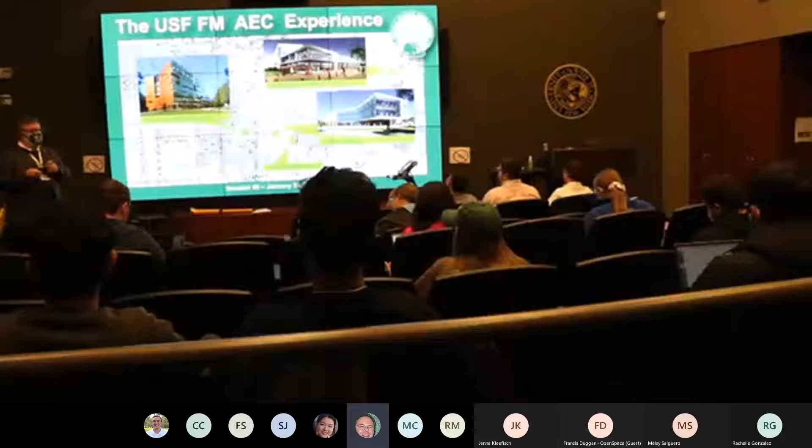So let's see, all right. So we are, as I said, in the second semester. This AEC experience encompasses in-person tours, you'll get to tour the job sites twice a semester. We also have a tool that you can tour virtually, you'll learn about that today, that you can walk around the job sites virtually, which is pretty cool. There's also webcams. So all of that, if you just Google USF AEC experience, you'll be taken to the facilities management webpage that outlines all the opportunities, right there in the bottom right-hand corner. Also, if you want to, you can join us on the Bulls Connect and connect with us.

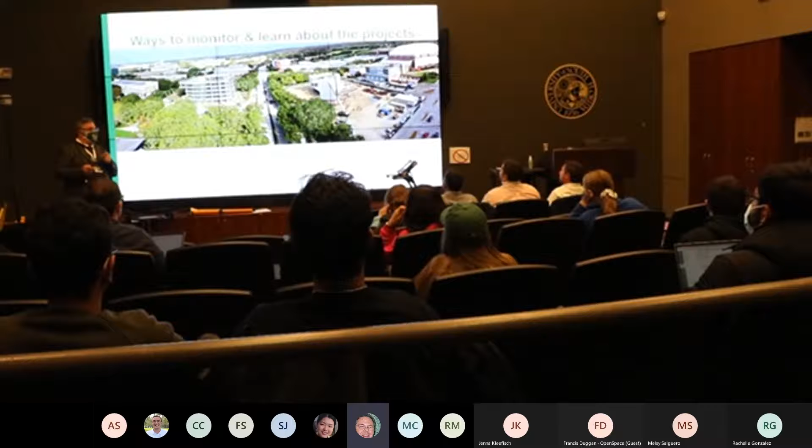So this is a fairly recent photo taken. You can see the Honors College on the left of the screen, the Wellness Center on the right-hand side of the screen, and all the way at the top right, you'll see an area of sand. That's our sandbox that is now the indoor practice facility. They're building the foundations for that, and probably in about 2 weeks you'll start to see some big steel going up over there.

Today, what we're going to be talking about is how other technologies are used to support the design and construction process. You may think, well, I'm in computer science, information technology, this really doesn't apply to me. Well, you'll see how a bunch of, and I use this term affectionately, a bunch of geeks from, I think it was MIT, got together and started a company called OpenSpace that is transforming the way we document construction projects these days, incorporating artificial intelligence. Francis will talk about that, talk about how we do research about the existing sites that we weren't able to do a few years ago.

So today we have Daniel Gessman, and I'm just going to refer to these guys. So if I rode over in an SUV from our office today, it's like driving with the Three Stooges. So Daniel Gessman is our GIS analyst, he'll tell you about what GIS is.

Richard Piccinini is our university civil engineer. And Francis Duggan, who is going to join us online, and we'll figure out how to pipe him into the speakers, he's going to give us a demonstration of OpenSpace and what that is and what that software tool does. And then Rob Baynard is our quality management coordinator, he's going to talk about some of the technologies we use to actually figure out where our buildings are leaking, how we maintain our roofs, how we look for that kind of stuff. You may think from a science standpoint, this is really cool to actually use some of this technology in actual application, how it's actually employed.

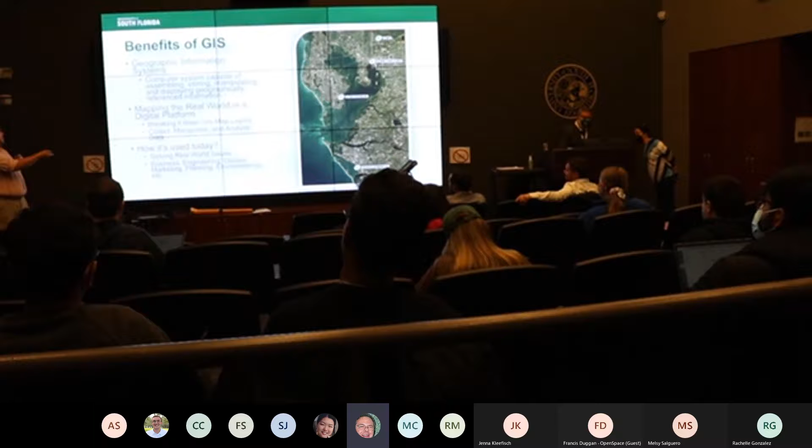Maybe. But we need to know not only what's under the ground, but then what is the impact of putting that structure on the ground as well. Maybe. Oh. No? Okay.

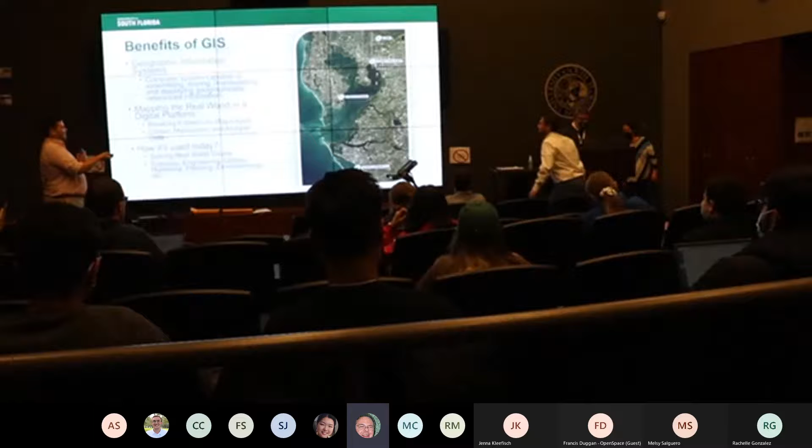One more, okay perfect. So again, some of the ways that GIS is used, a big one is in decision making. It's obviously influencing policies, determining what is the scale of said issues that are on the ground.

Asset management: what do you have? Where is it? What's the information that you need behind it? And then taking that information and also modeling it.

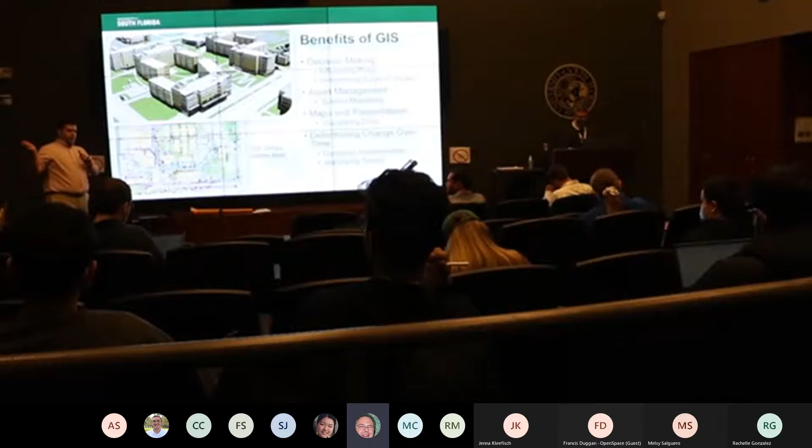Being able to create a system where you have points representing valves for a water line, and you have a water line connecting all the way further down the street. If I turn this valve off, what's the impact down the line?

So we can actually model systems like that, especially in Rich's presentation. He's going to talk a bit about stormwater and how, when it rains, what is the impact? Will our system be able to handle that 100-year flood?

Maps and presentations, so visualizing data. It's really a much better way to view things. I mean, I can imagine you guys looking at an Excel spreadsheet every day would get really boring. So in this sense, it's taking that information and putting it into a geographic reference and being able to see it.

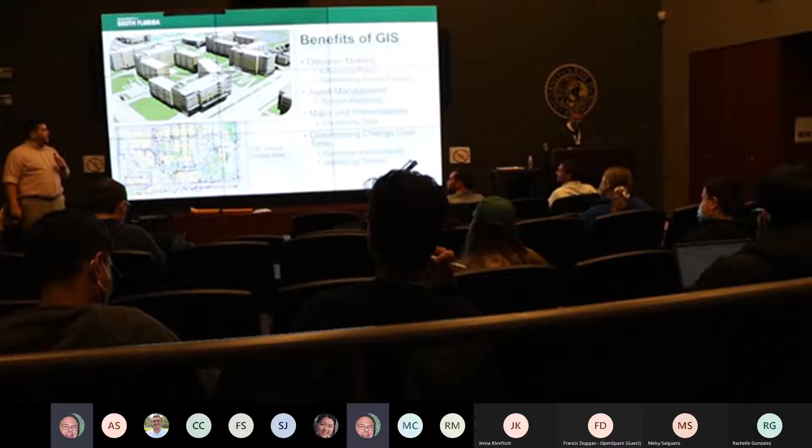And then determining change over time, like looking at condition assessments, looking at the conditions of our utilities in the ground. Over time, do we need to replace those? And again, rounding it all the way back to decision making.

As you can see, some of the images we have is one of the 3D models that we've built using BIM. This was actually taken with imagery. And then some of our utility networks throughout—it looks like a mess, but we somehow know what we're talking about.

Next slide, please. For some reason, the clicker doesn't want to work today.

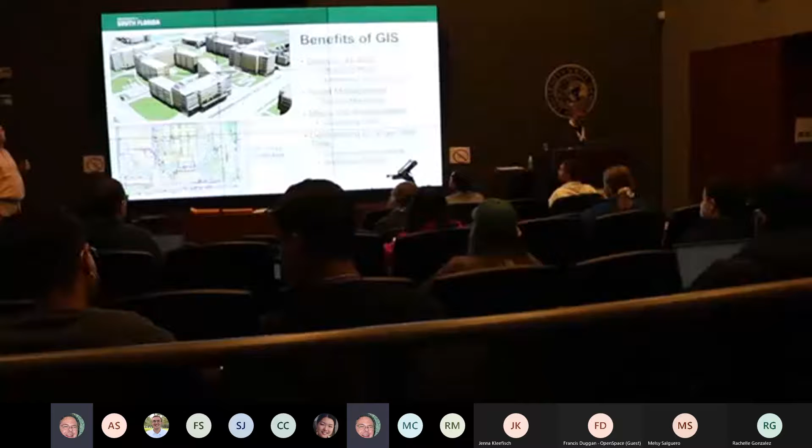So here we are. Relating to what you guys have been listening to lately, we've built a GIS system here at USF. And where we really started was with AutoCAD drawings, that was all we had. So all we had was points, lines, polygons in a CAD drawing or in a PDF, and you really didn't know what you were looking at.

You couldn't click on a manhole and have it tell you all the elevations associated with it. You couldn't click on a building and have all the building information associated with it. When was that building constructed? Who owns that building? Is it leased? Is it owned by the state?

So really, we didn't have any of that. We converted all of our CAD drawings into our base maps into GIS. And where we are today, we've worked with the library to build a facilities enterprise GIS, which I'll talk more on the next slide. We also have BIM, CAD, and FAMIS, our asset management system. That's how the drawings come in after a building is complete. We receive those drawings, or a list of assets associated, and we tie those into either our asset management system, or we relate all those utility drawings and civil drawings into our GIS system.

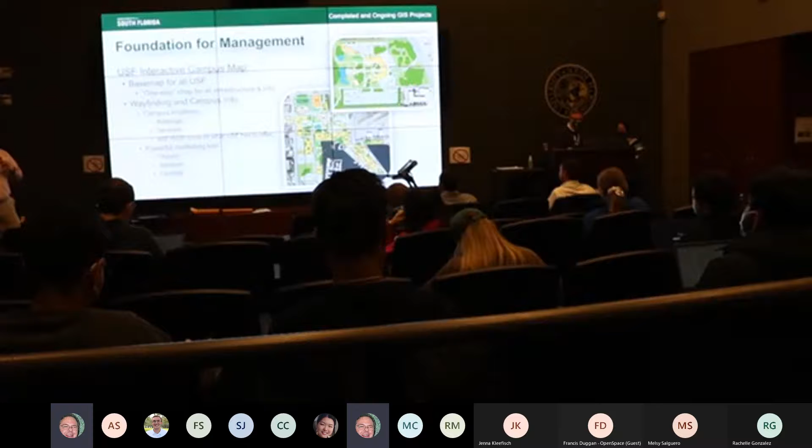So a little bit more about our interactive map that we're developing. Like I said, it's a one-stop shop for USF information, for public information. Everything from buildings, services such as where is your dining, where are the Federal Credit Union spots, where are all the departments within those buildings, where are your gender-neutral restrooms, where are your blue light phones, etc. The list goes on and on. It just allows students to show what USF has to offer. Also, we're looking at it as a major marketing tool to potentially bring in prospective students, any visitors coming to campus, knowing where to park.

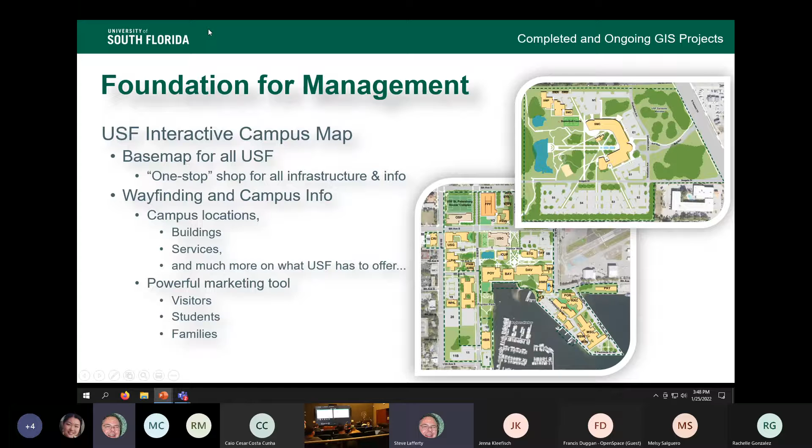And of course... yeah, I know, he's cutting me short apparently. Who would have thought two years in we would have figured it out by now.

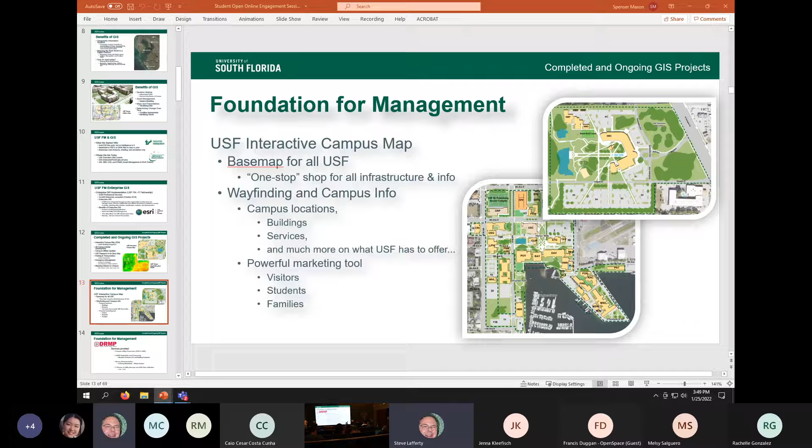So some of the projects we look at, we treat GIS kind of like a foundation for management. It really is a one-stop shop for campus information. We worked with a company called DRMP. They did all of our conversion from CAD to GIS. We flew LiDAR for the campus. We put in some survey monuments, and we did three utility phases where we did surveys and GPS data collections.

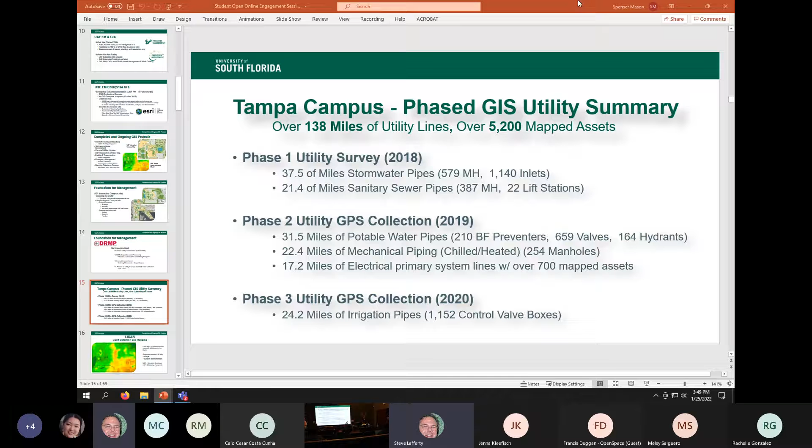I will avoid the long list of things that we've collected, but in short, we're still doing even further collection. We're probably looking at anywhere between 150 to 200 miles of utility lines. And at the moment, we're over 5,200 mapped assets just for the Tampa campus alone, and we're only a 1.5 square mile rectangle.

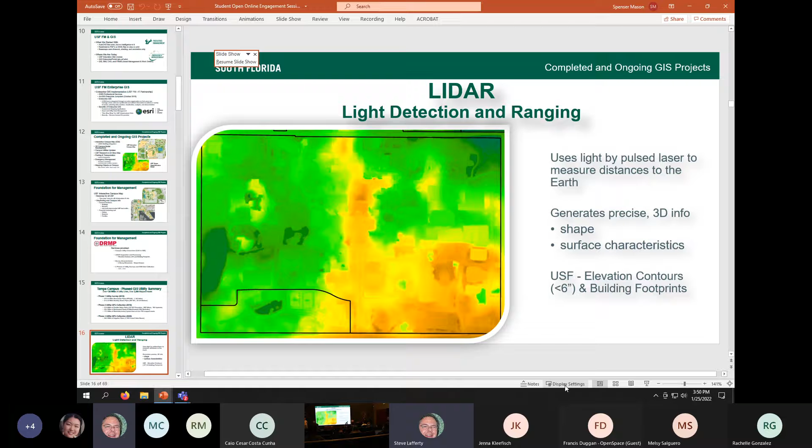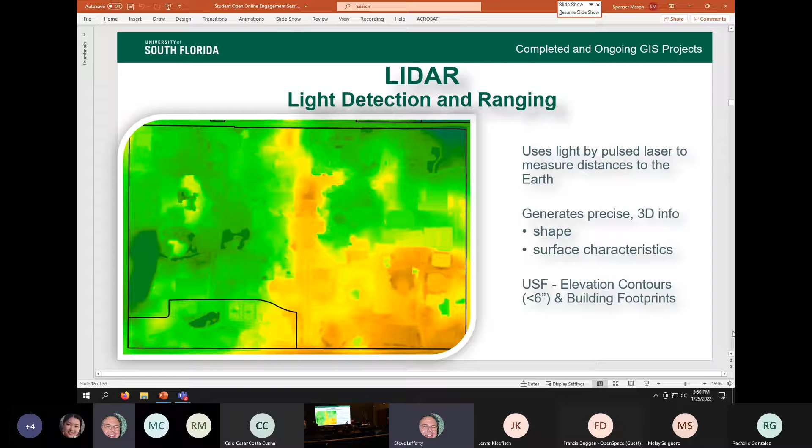One of the big things we had done was LiDAR, or light detection and ranging. We had a company do a flyover of campus, and it uses light penetration where it pulses down and we receive the signals back from the plane, giving us a precise 3D image or map of the surface characteristics of our campus. You can really get an image of the elevations of our campus. We can pull out elevations, building footprints, hardscape — we got pretty accurate results, within 6 inches of accuracy for most of our stuff.

Steve, can I steal you for the next slide, sir? I'm almost done, we got a lot here.

Oh, can we go back probably 3 slides? One more? Yeah, there we are.

With this project, we also bought a brand new GPS unit that gives us centimeter accuracy. On most stuff on a clear day, we're within probably 0.1 to 0.2 feet on all the structures that we're mapping.

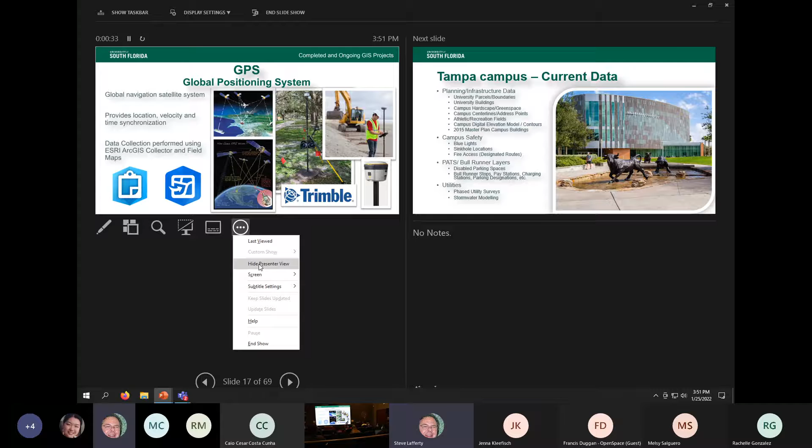We're using some data collection tools through Esri that allow us to map everything from valves, as we were doing before, to mapping sinkholes, to mapping anything we want. I think Grounds was out there doing benches and trash cans a few months ago.

So a long list of data that we've brought in over the past 4 years, covering planning and infrastructure, campus safety, all the parking and transportation layers, and utilities.

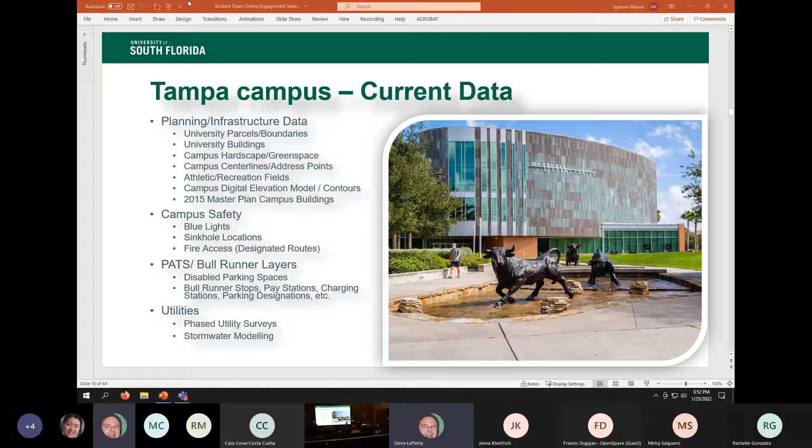And then what do we do with all this information? Now that we've gone through how we've collected it, we take this and use it for different planning efforts. As you see up on the top right, that's the 2015 campus master plan.

We now can look at the utilities digitally, zoom in and out, view it all in the palm of your hand or just on your screen. We look at campus safety, so campus awareness before, during, and after an event that potentially happened.

So it allows us to plan better for hurricanes. It also gives trainings for any potential active threats or other incidents that may occur.

Utilities infrastructure management gives us the better ability to map with 811 locates. So our utilities guys have those maps in the palm of their hand just by zooming around, and it actually follows their location based on their phone or tablet, leading them up to the manhole, the valve, the transformer they're looking for.

I mean, they can't really miss the transformer, but it also allows us to share information out to other agencies. We share information to Hillsborough County 911, Pinellas, and Sarasota Manatee. We also share information with Esri's Community Maps to update the base maps that sit behind all of our applications.

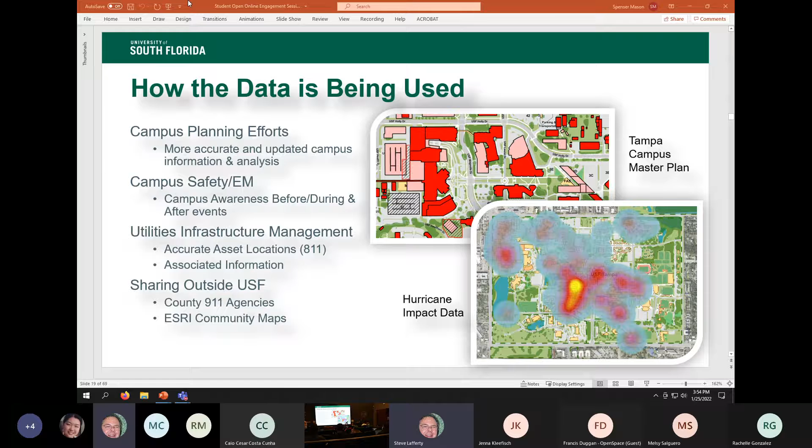So I'll leave this open for question and answer before I bring Rich into this. Do we have any questions? Oh, it's quiet. Raise your hand, or just scratching?

I could refer to Rich on some of these too. Not that I can think of off the top of our heads.

It's just been, we found a lot of utilities that we never thought were there, or things that were abandoned in place from a university that's 60 years old, that a lot of times we've hit with a shovel or someone else has hit with a tractor.

Okay, let me know if anyone has any good jokes while we wait. Mine are all dad jokes, they're not very good, it's all about lift stations. No, that's a different presentation. It's a dirty joke. That's true.

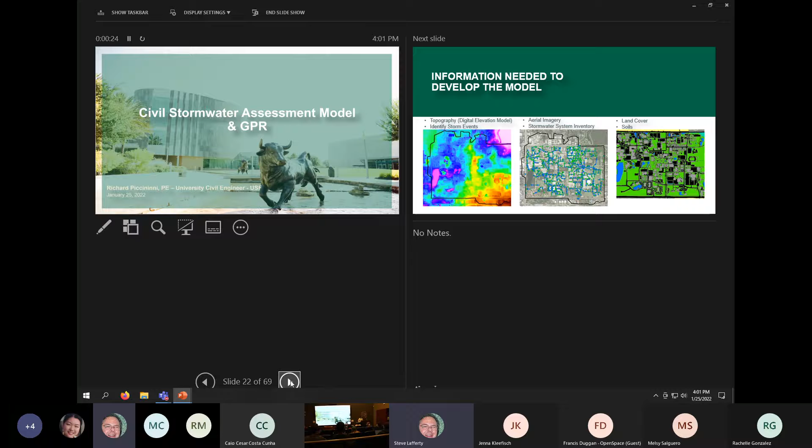There we go, there we are. Okay, that's one. All right, is that me? That's you, all right, that's you. All right, here we go. Now we just have to present it to the people on Teams. Oh, man. There you go, try that. No, that's a different screen up there. You may have to click both. Let's go to this one. Hold on. I don't know how to tell if the people on Teams can see, they're the...

Seeing what's on this screen. All right, okay, so can everyone see this, the slide with the bull and my name on the bottom? No, negative. All right, so, that one? All right, well, you go talk and I'll play with this. Well, that's where I'm talking from. I can't talk if... all right.

Oh, there we go. All right, so I used a lot of Dan's material that he collected, and I created a stormwater model. There are several things you need in order to create the stormwater model. If you look on the picture on the left, that's the LiDAR information that we got.

You can see the red areas are the higher portions of campus, and it goes down to the pink areas, which are where our retention ponds are, in essence the lower elevations on campus. Then the middle one shows all the pipes and inlets that we located, put on an aerial just for convenience sake. One of the last things you need is the ground cover, what it is, for instance the difference showing where a building is and grass and/or roads. That'll help you model better where the stormwater actually goes.

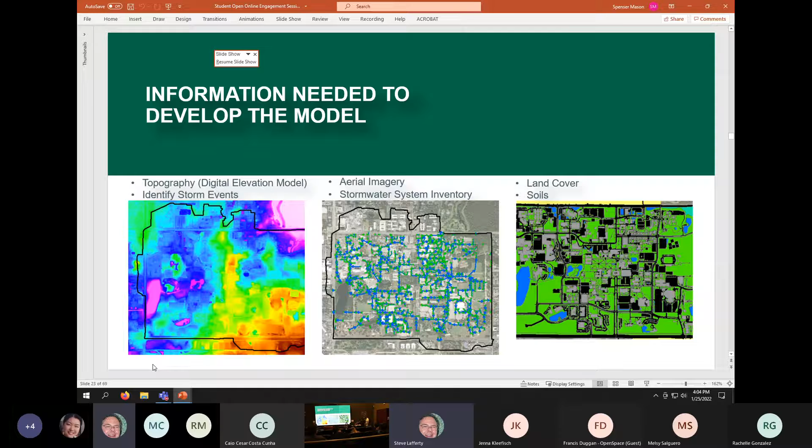So when we imported the LiDAR into the model, this is what comes in. It's a 2D mesh, and you can see there's a whole bunch of triangles, and each of the connection points, the center points, has an actual elevation associated with it. When you stick it on the model, a drop of rain would go depending on how the elevations between those points are set up.

The LiDAR data gets a little squirrely because if you bring it in over here, you're going to have a building, and the building would tend to go vertical, which would make your lines incorrect. So we have to go in and create break lines for that so we can identify where the building points are.

Similarly with the roadways, when there's a curb and gutter, you can see this is crown, and that helps you direct the water into the inlets, curbs and gutters. Now, if you look on the page, the X's and circles are where the inlets and pipes are located.

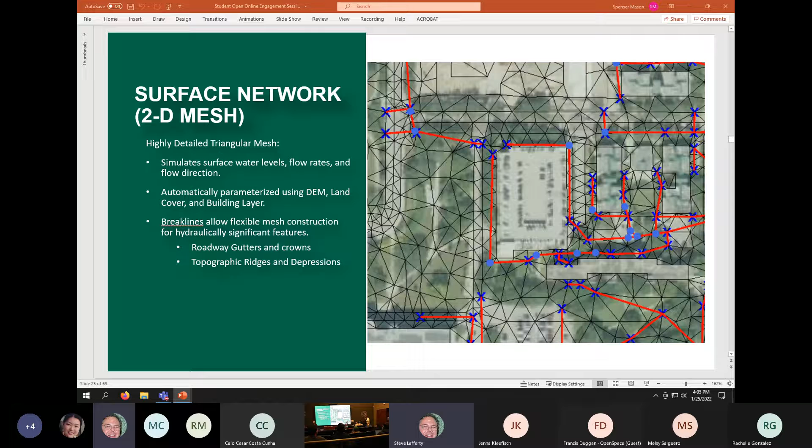Once we ran the model using the information shown, we were able to get some good information out of it. For this example, I created a path of a stormwater pipe. That's what comes out of the model. The stormwater pipe on the bottom, the south end, you can see is full or over capacity, and as it gets down to the part that goes to the northeast, you can see the pipe is much larger and has capacity for expansion.

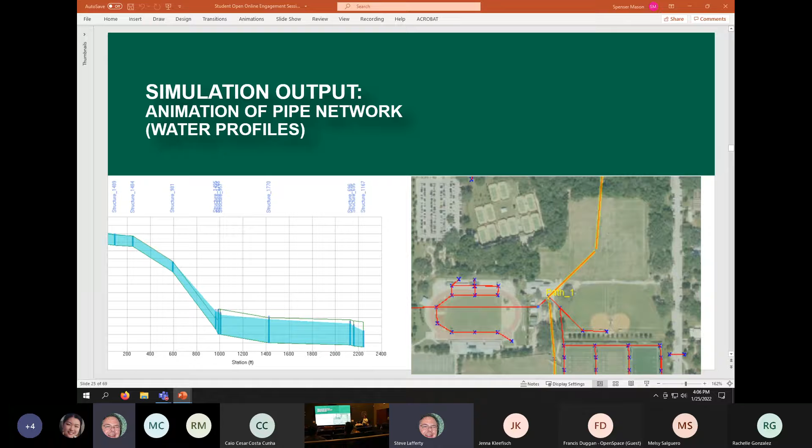Also on this model, let me back up a second. Each different agency requires you to model a different type of storm. For example, the Department of Transportation requires you to model a storm that allows the roadways not to flood. Similarly, the Water Management District wants to make sure the rivers, streams, and people's homes do not flood. So when you create a model...

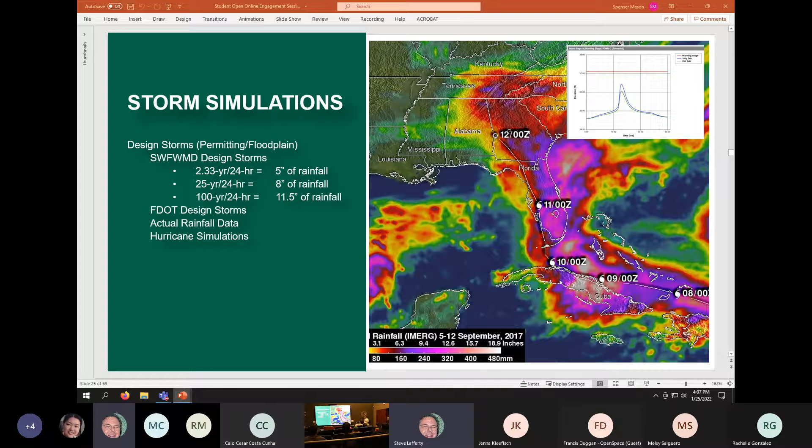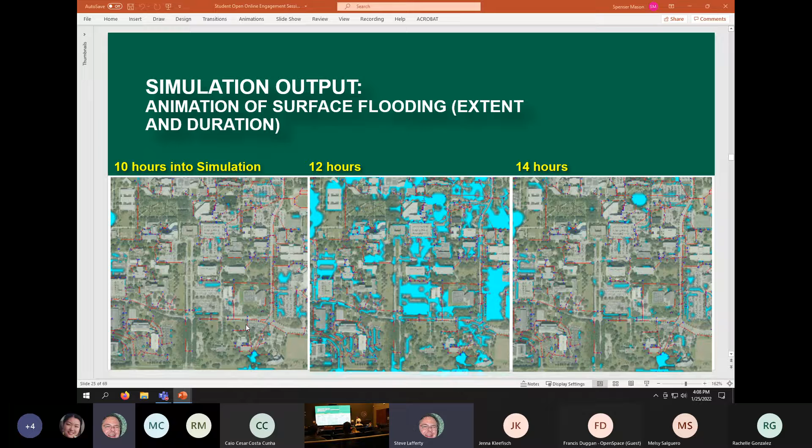Okay, so now we'll get into the way that me and Dan work together to get the data acquisition for all the maps and the stormwater modeling. So we use the GPR, which is over here, our lawnmower.

Then we use... you're going to model this for me? I'm going to model it? Yeah, go ahead and get the Schonstedt for me.

We're going to move to the Schonstedt. They can see this one. So this is essentially a high-powered metal detector, and we use that to find electrical and ductile iron pipes that are under the ground. So we can get an idea where they are with that piece of equipment, and then we can verify with the GPR exactly where they are.

Once we get an idea of where the pipes are, we use the probe rod to poke the ground and physically determine that, yep, the pipe is actually there, and get a depth on it.

And when all else fails, the mighty shovel. We use the trusty shovel to dig it up. Be careful when you use the shovel, some people have fallen using the shovel. Dan, it was quite an event.

We can click one more.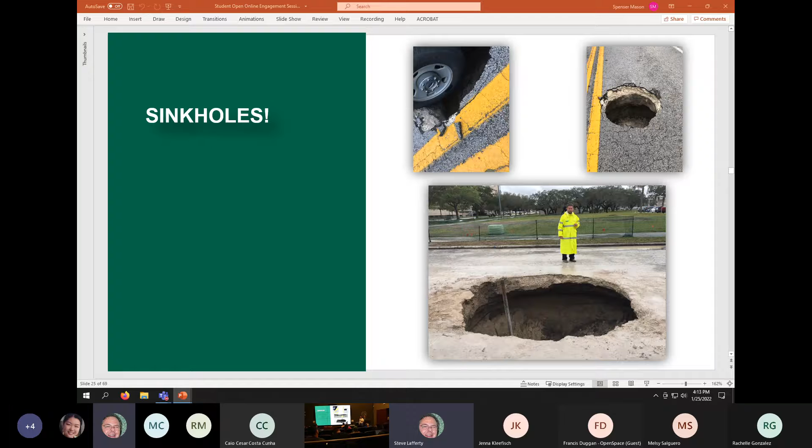And then, you want to talk about the civil? So this is basically between the GIS and all of the civil information that we've got, we can basically build a virtual model of whatever building we're building, whatever campus we're doing, and be able to simulate how they're going to react in certain conditions.

We can do that with traffic. Our mechanical engineer does it with our chilled water and hot water systems. Rich does it with our sewer systems and our stormwater systems. We can now model how all of our different systems are going to operate under light loads, heavy loads, emergency situations, and figure out where we need to invest money in the future so that we can increase the capability of our campus.

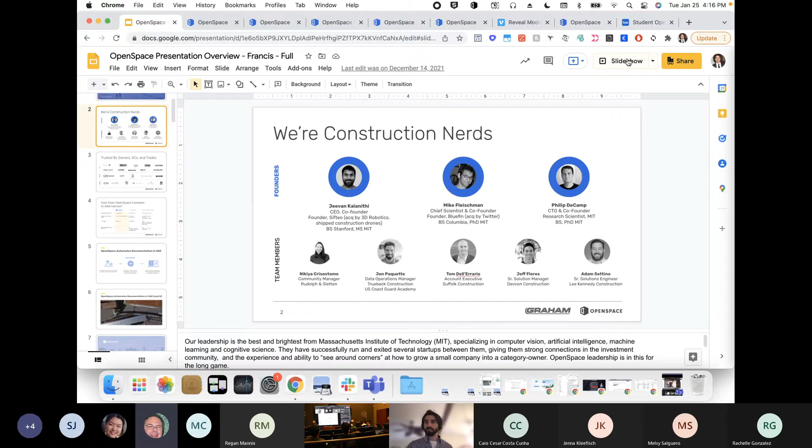For today's presentation, I'll expand on this in a second. Ideally, we're going to talk a little bit about our software and things like that, but also about the direction that these engineers took, as well as myself, in our careers and choices we made, to maybe help encourage some folks in terms of what to get involved in and where things are going, depending on your interests.

So I went to school originally for communications. That was kind of an easy major - basically you could just not have to show up to class. I liked that for the first year or two, and then eventually I switched to accounting and finance, which I thought was a good idea.

And I graduated right into the 2008-2009 recession. So I was at Merrill Lynch, they ended up getting absorbed by Bank of America, and I was back on the picket line, going door to door, selling life insurance policies as well as financial advice, at 22.

So needless to say, eventually I got to this side of the game. I worked for Apple for a little while, then started my own company out in San Francisco. We kept that running, and then eventually I continued - they were like a Zillow competitor. They're still in business today, which is great, but eventually I got over here to the construction side.

So one of the things I would say is, when looking at career paths, think about what you want to have influence on. For better or for worse, there'll always be construction. As you know, with COVID-19 and everything kicking off, I was in New York City, and construction was one of the necessary businesses that started back up right away.

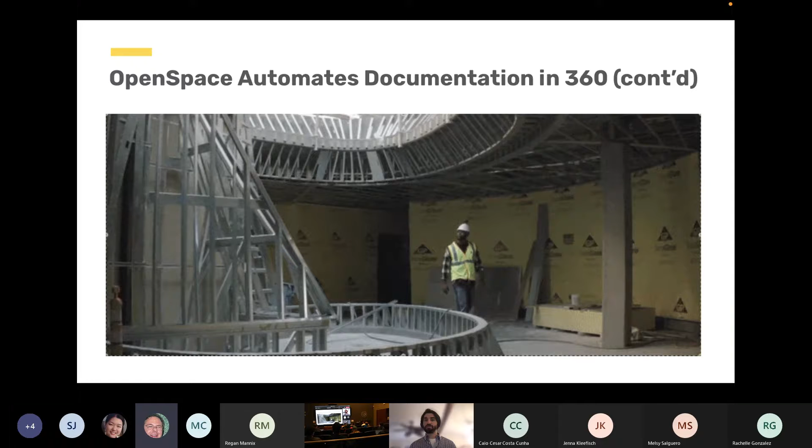Other companies in the space decided to outsource a lot of that stuff, and basically you'd have people overseas manually going through every individual photo, mapping it up. You'll run into a bottleneck pretty quickly, as one of our competitors did.

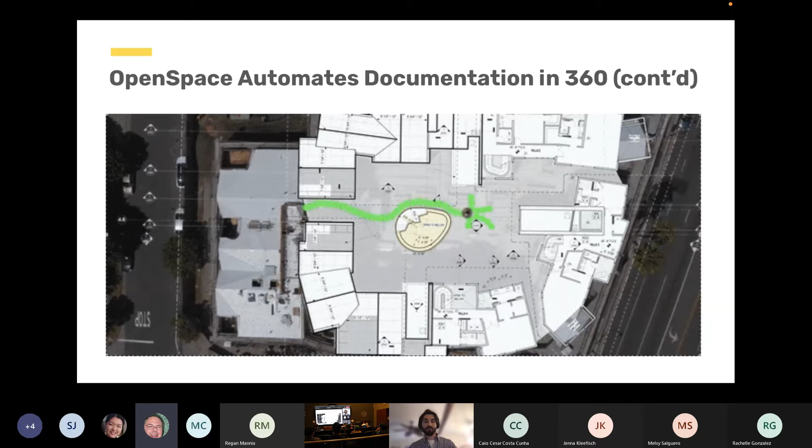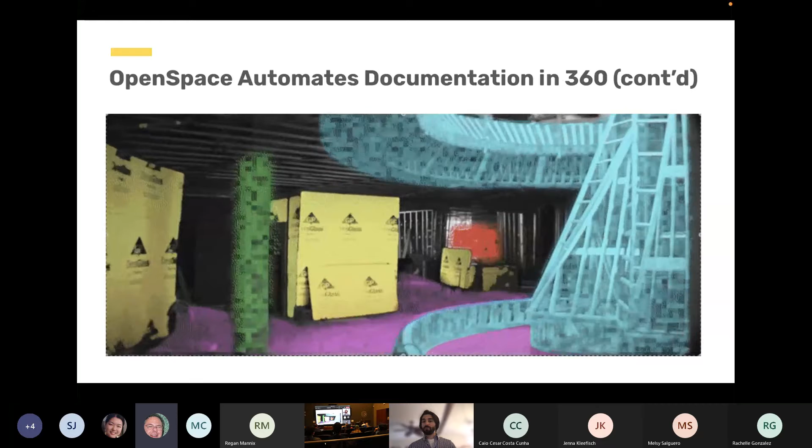And then, of course, our CEO, who's a baller for lack of a better word, he's done pretty well for himself, and he's kind but cutthroat, and he wants the engineers to be the winners in all of this. He decided to just give away a product that was a direct correlation of one of our competitors' products, and put them out of business as well.

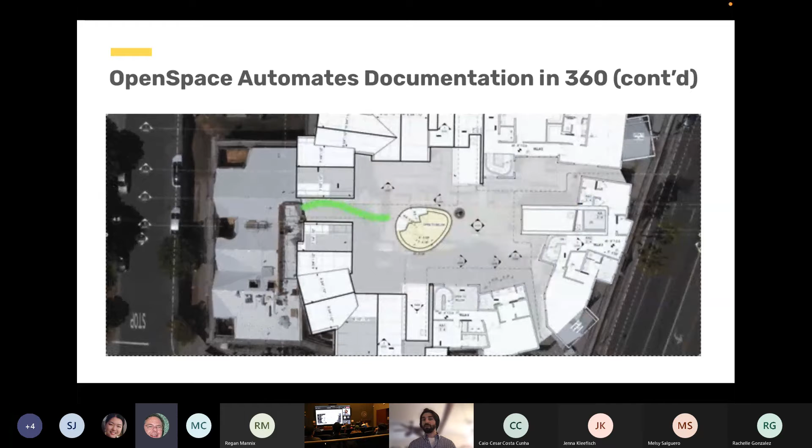So you want to be kind, but at the same time, this is a business, and we're developing automated 360 documentation. When your algorithm and software happen to be light years ahead because you took the time to create it right, you should try to win at that. And that's essentially how it works.

So you push a button, you go for a walk, and in 1 to 6 minutes, because the machine's gotten smart enough, it will automatically create a 360 street view to drive around. Versus manually doing this, which takes people 13 minutes per 10,000 square feet - you have to take all the photos, categorize them, put them in Dropbox or whatever it may be, and send it out. But with this, it's all automated. That was kind of our first thing we wanted to get right.

We want to focus on that. Now the machine reads what it's seeing, similar to Tesla's driverless car, it can tell what a stop sign is, things like that. With this, it can tell how much drywall has been put up, how much framing, how much electrical, how much mechanical, concrete, and we're going to start getting into safety and things like that as we progress.

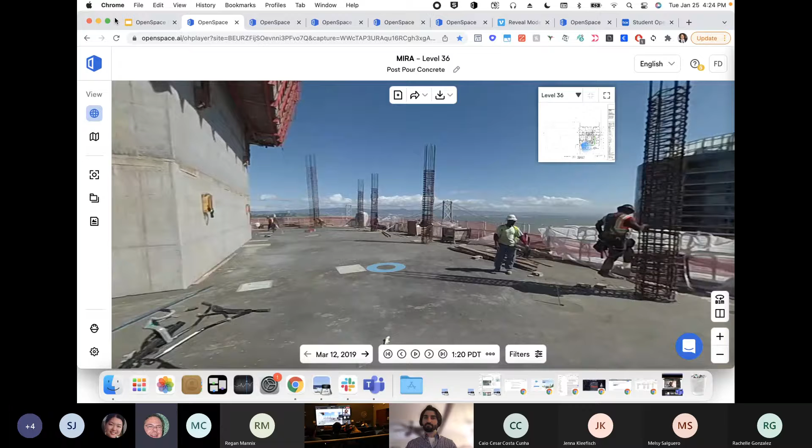So let me jump into the overall product here. I'll get to your campus in just a minute, but just to give you a quick idea, this is the MIRA Tower, a pretty big project out in San Francisco. Somebody goes for a walk, it automatically maps to your set of plans there. And it's like a Google Street View type of environment - you can zip around, apologies for the latency, and take a look at everything that's going on.

This is big for a lot of different folks involved. I can split the view and look at yesterday's before the concrete pour, so it's good for all sorts of engineers and project managers to know, okay, this is what it looks like post-pour, there's certain things below the ground we need to be aware of. It's creating essentially a catalog, a database to live with the assets forever. If you think about USF owning these properties, they're going to want this type of live, historical, visual data on all these different assets they're developing or renovating, to live with the campus forever.

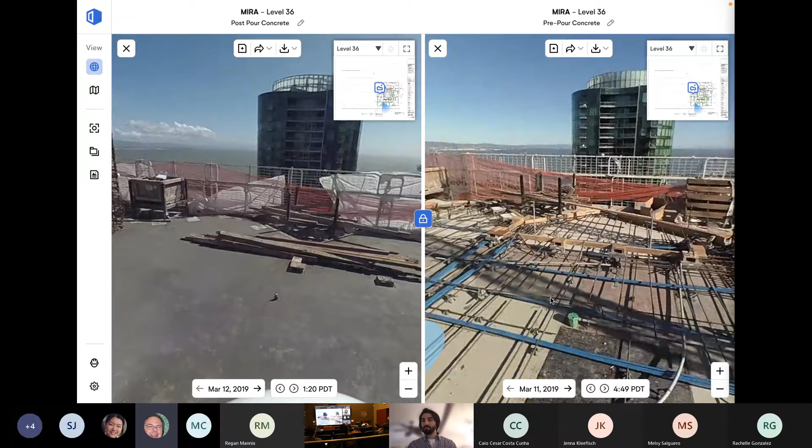Once you get into higher ups, major investment firms like the Blackstones of the world who own a boatload of real estate, from an asset management level this is pretty important, especially looking into acquisitions or heavy renovations on existing portfolio. For people on site - the GCs, the subs - having this data, being able to see through walls, floors, ceilings, makes their job a heck of a lot easier. And when it funnels up to the money and the people getting paid, or the investors, it makes the asset a lot more valuable to have a historical database of everything that's happened.

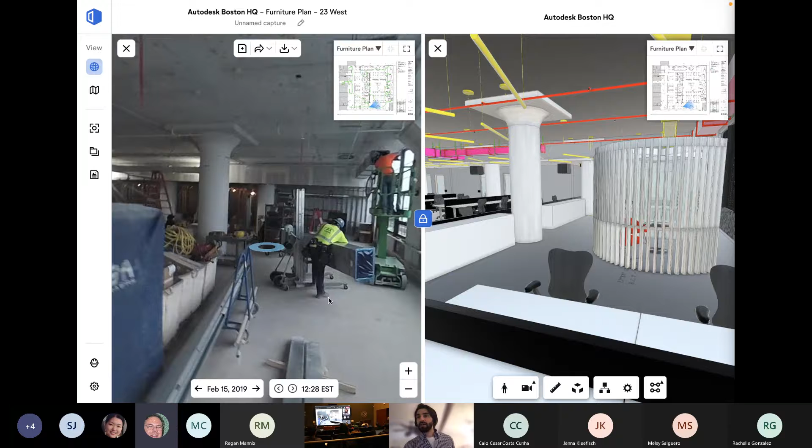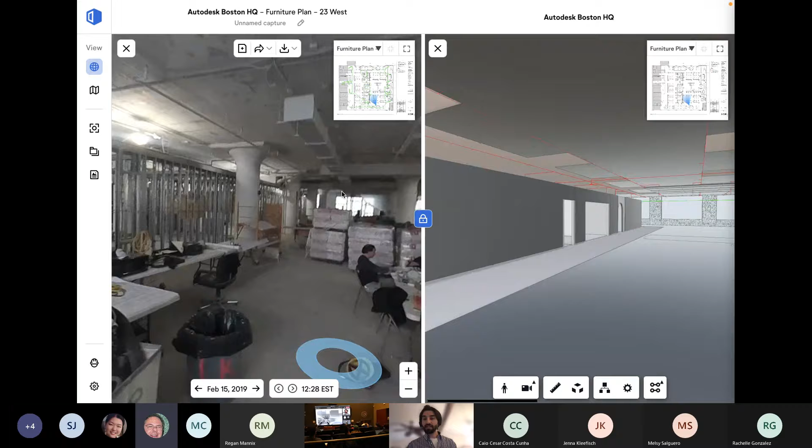The other thing too is we talked a little bit about BIM - this can fully connect with BIM. One of our big customers is that company who just moved their headquarters into Austin. You may have YOLO'd on the stock here or there, hopefully did okay. But essentially one of their big things has been coordination issues developing one of their facilities, and understandably so. By connecting it to BIM, it gives you the ability to see everything that's supposed to go on, understand whether you'll have enough space for the duct work or the electrical coming in.

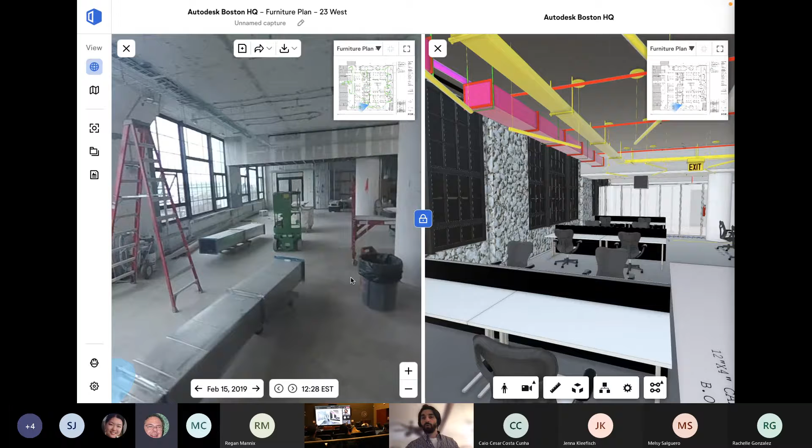As the different trades funnel through the project, this can do everything from using BIM on the right-hand side to measure different areas, use it for exterior, interior, doesn't matter. You have this nice ability to flow along with the project as you view everything that's happening and coordinate between the different trades.

One of the big things that came out with the new iPhone is LiDAR. Just thinking about you as students, where you're going after graduation and with jobs - technology is moving at a pretty rapid pace nowadays, we hear about a new one all the time. But LiDAR is kind of an easy one for our engineers to have tied into. Essentially one of the things people run into on site - and you can do this with the new iPhones - is things like, you got to measure a lot, right? So let me go ahead and see what we got here.

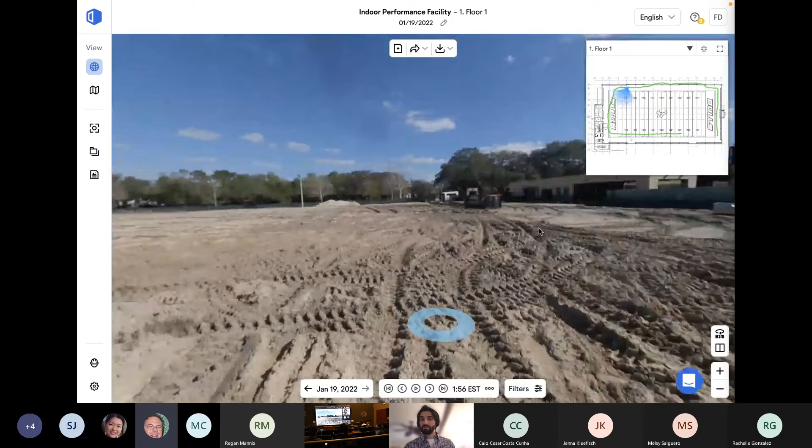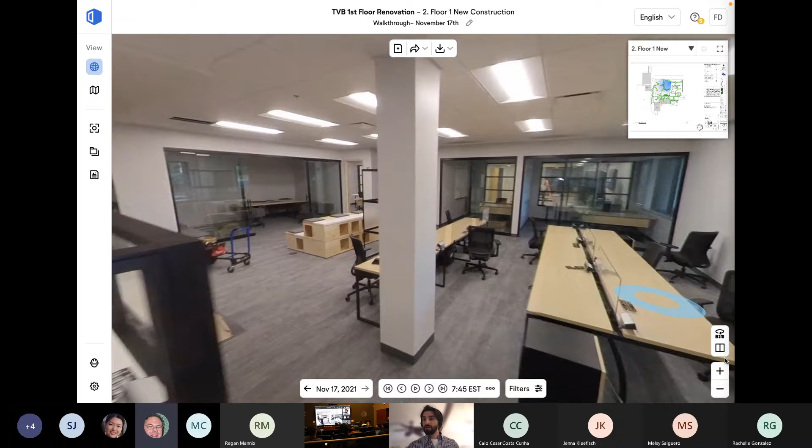Okay, so I'll wrap up right here. So here's your facility, right? And it's automatically, again, creating this kind of nice Google Street View, so you can drive around your facility. Over time, as you kind of, here's the renovation that you did, you're going to be able to see the facility mature. And then at the same time, you can go back in time and see what it used to look like mid-renovation.

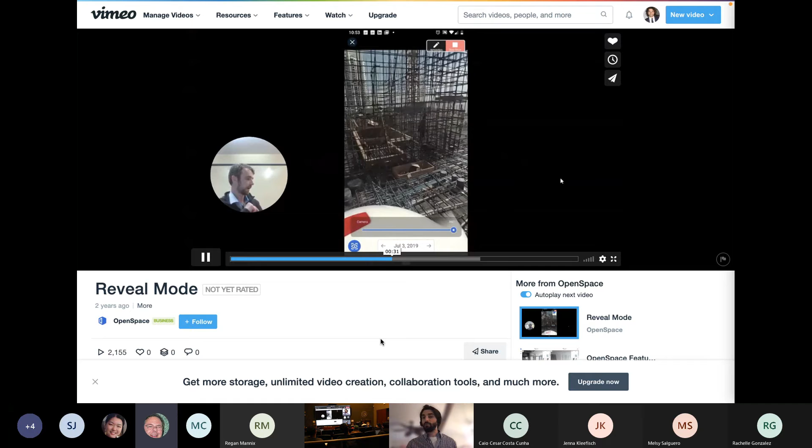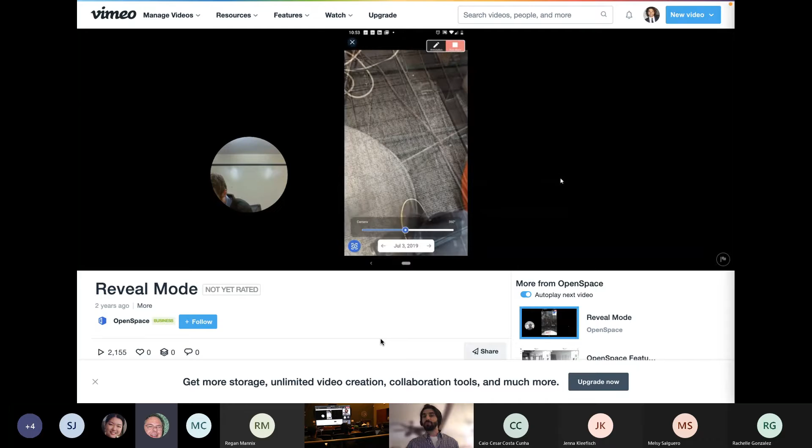And of course, this helps with pay apps and things like that. So when people finish a certain percentage of the work, you'll be able to approve the pay apps on the job. And then lastly, I can walk onto your campus at any time, take my cell phone out, and see inside everything, floors, ceilings, whatever it may be. That big facility you're putting outside there, I'll be able to see what the grounds used to look like, what it looks like today. So it helps from everything from a potential legal issue all the way up to maybe you're trying to do another renovation, and you'll have this digital archive forever, kind of a skeleton type view on your project. I'll close with this.

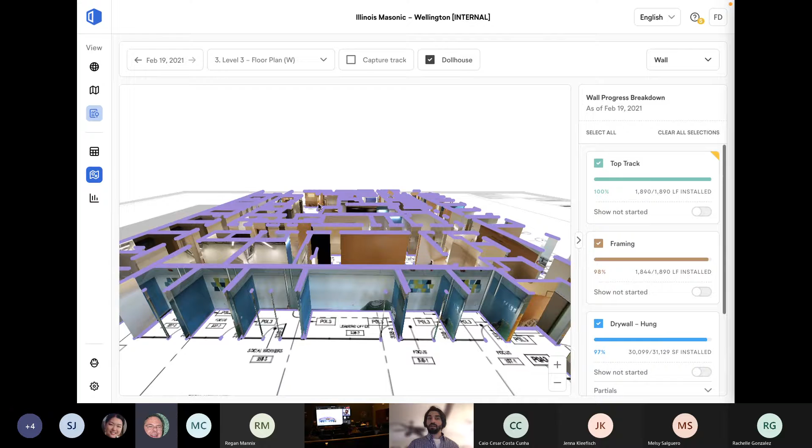The last thing I wanted to mention is the AI now is tracking what drywall is, what electrical is, what mechanical is, et cetera. So when you walk by any of these on site, thousands of little bots are reading every single image individually, and it's automatically mapping and essentially sharing, hey, this is drywall taped, drywall hung. And this is big for projects to figure out whether or not they're going to be on time as well as obviously on budget. Because it's going to show you, on average, we're doing about 1,500 square feet of drywall per week. You should finish by the 24th of February, for instance.

So we built the machine to read. The first thing we did is, let's go ahead and create a Google Street View and do it the right way. And now the machine can scan and see everything in time and space and automatically count. So as we kind of grow further along in this process, it's going to be able to start to make its own floor plans, measure rooms you're just walking through, all through just AI essentially. So, all right, I'll stop there.

Let me go into the. There we go. All right. So does anybody have any questions for Francis? I'll take that as a no, but one of the things you'll see, and let me turn this off. How's that? There we go.

So one of the things you're starting to see is a lot of things are coming into the construction industry. As he said, the construction industry is ripe for disruption, in the last 100 years, because construction really is a manual process. It's a bunch of workers putting together Tonka toys or stuff like that in real life. And so there really has not been a huge increase in production capabilities over the last 100 years. There has been in almost every other industry, but construction has been one of those industries that's been slow to really improve its pace. You're going to start seeing that increase incredibly over the next few years.

All right, you want to get that? I'll bring it on up, if I can. Right to the mouse. Mouse keeps disappearing. There it is. All right. Is that you? That's me.

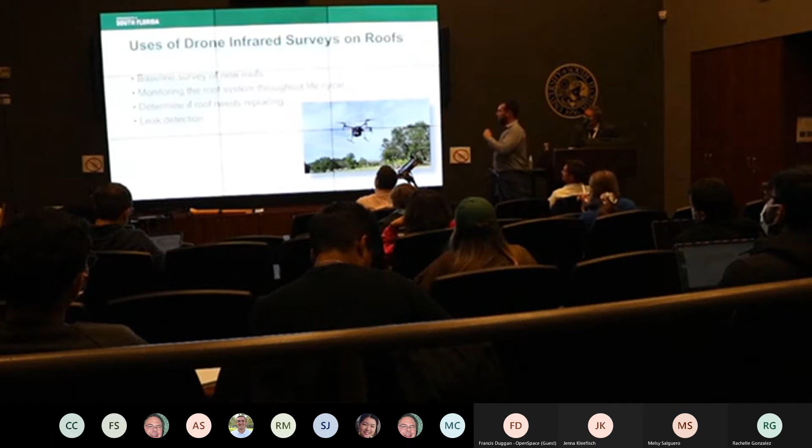I'm Rob Baynard, and I'm the USF roof guy. I don't really have anything to do with this technology on the actual building and development of the facility, but once we do take control of the building, we use infrared and drone technology to maintain that building.

All right, get that out of the way for you. That would be nice. A well-oiled machine. All right, so we have part of a screen.

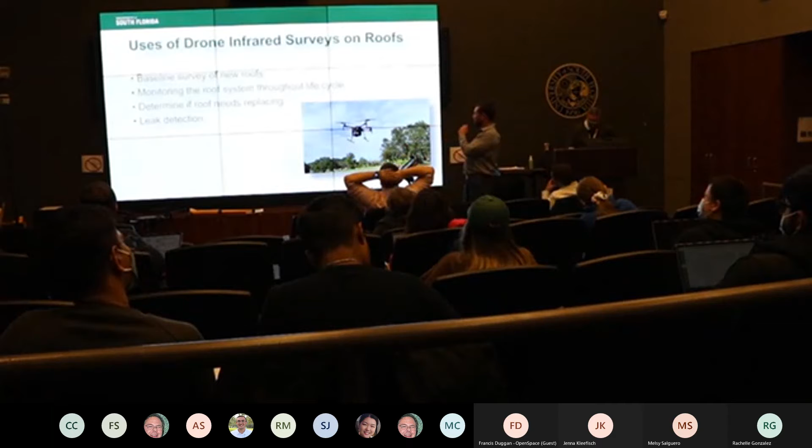All right, there's a whole screen. So we do a baseline survey of the roofs, make sure that we are getting what we bought, which is a dry roof. Throughout the life of the roof, we'll continue to monitor them annually, semi-annually, whatever rate we feel is necessary for that facility, and continue to check it throughout the life cycle. It helps us determine if the roof needs replacing or what our other options are, and it can also help in leak detection. That's our fancy drone there, right up at the front.

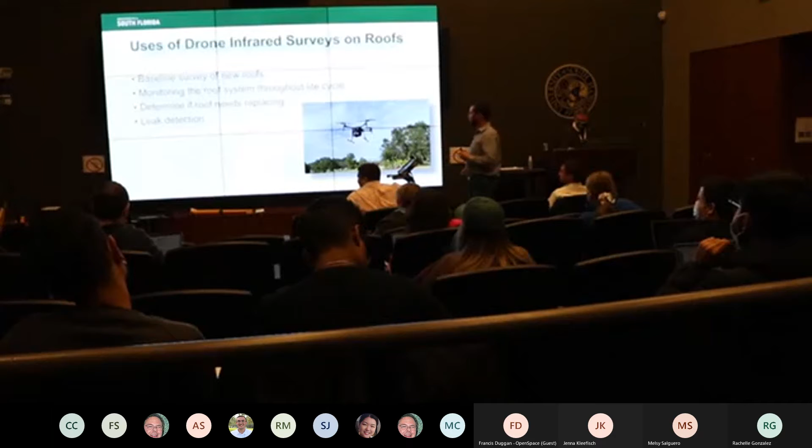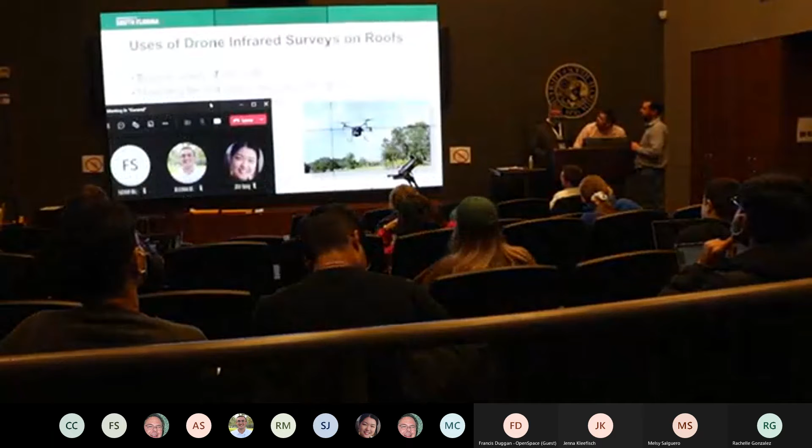Next slide. That pesky screen keeps popping up. Okay, it was there, now it's not. I have to find the mouse. It's there, sorry. I did, and now I'm trying to drag it. Or is it over? How many guys does it take? There we go. All right. Next slide, please. No? It should be. All right, I hope you enjoyed the presentation. All right, thanks, Rich.

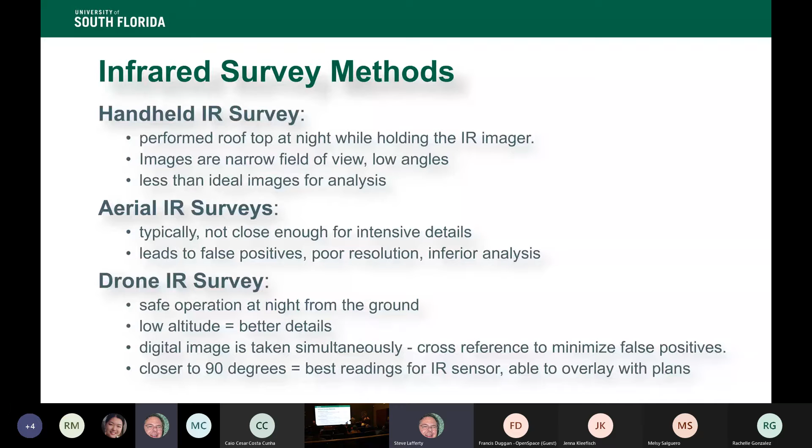Typical infrared survey methods: handheld is the old traditional method. You had an infrared imager in your hand, and you'd go up on a roof at night. You're working in the nighttime hours on the roof, not really the ideal working conditions, and it also doesn't give you the best quality of overall picture.

One of the other traditional means has been aerial IR surveys, where they had a sensor on an airplane. They fly up high, take a bunch of pictures, and then send it to you. But it tends to be higher altitude, so you don't quite get the same results as being closer to the roof and being able to get rid of the false positives.

With the drones, we're flying anywhere between 100 to 400 feet, a little closer to the roof, still high enough to give a good image. 90 degrees gives us a better image for the sensor. We also take a digital image with every single IR image, so we're able to say, hey, that's a pile of granules or debris in the corner, which is giving me that hot spot, so that's not a real anomaly. It helps us in that decision making a little easier.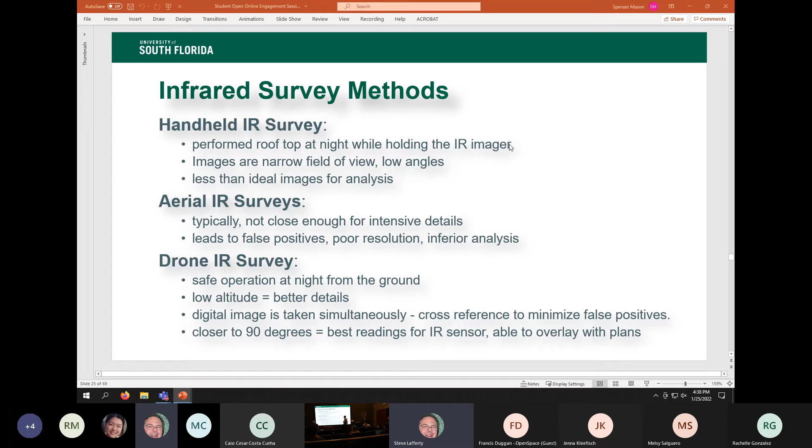Infrared for roofs, you have to do it at night. As you get the solar load, everything gets uniform during the day. The wet areas are going to retain that heat longer, while the dry areas reach ambient, and that delta T is what we're looking for. It's not telling us that it's wet insulation directly — that's just our brain knowing the difference in what we're reading. Temperature difference is what's going to tell us.

When you do an infrared survey, it's best to do a secondary means of testing to verify if your anomaly is wet insulation or not. Traditionally, core cuts are a great way to do that, but you're physically taking a sample of the roof, cutting a hole into it to determine whether it's wet or not. If you're ready to go to design for a re-roof, it's a great way of proof positive. But when you have assets of 300 plus buildings on a campus, you don't want to poke a bunch of holes in your roofs if you're not going to fix them right away.

Using an impedance meter like the Tramex is a great way to test for moisture. You take a known dry insulation reading, then go over to your anomaly area, and that verifies whether you're wet or not. It's a tool used in the roofing industry. It's a great tool.

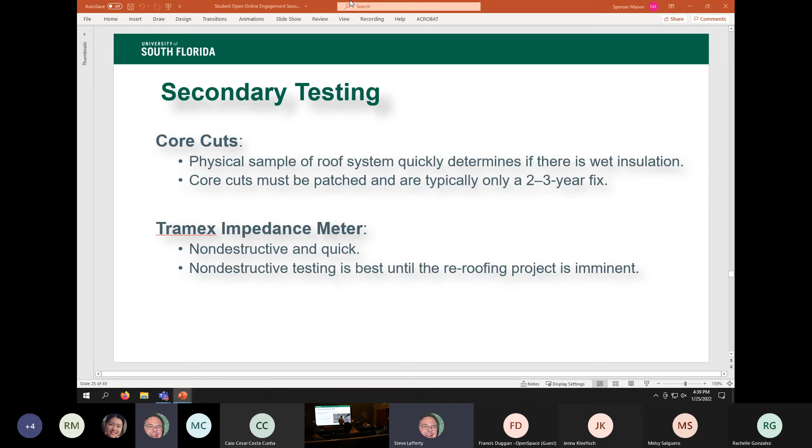So here we are taking the sample, and you can see the needle. It goes from reading completely wet, and as we get closer to dry, it reads zero. So it's a pretty accurate tool.

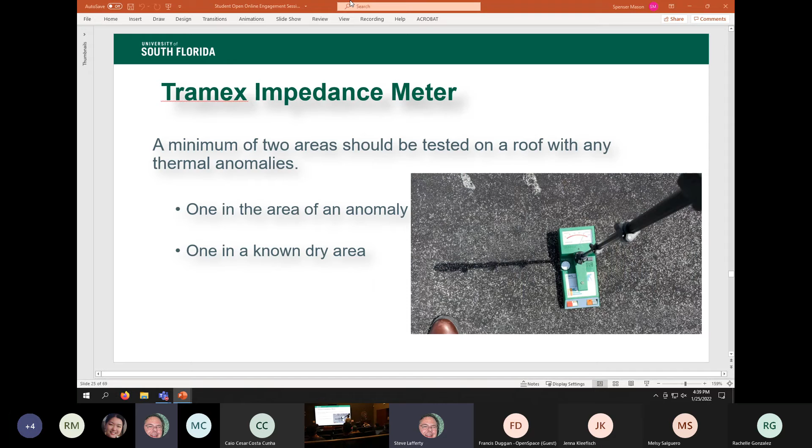So this is what a baseline survey looks like. Brand new roof, and in this infrared image, there's no anomalies. You get a little hot right here, but that's just because the sun's setting over there and the radiant heat. But that's a clean, dry, brand new roof.

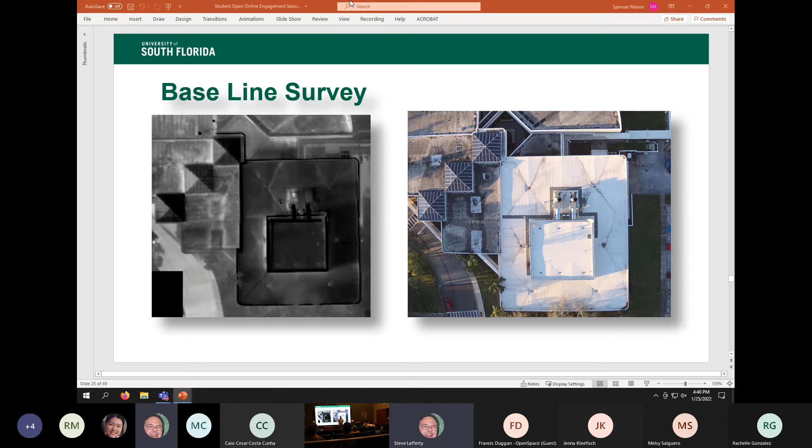For roof recovers or re-roofs, they're both technically called re-roofs according to code, but for a roof recover you can keep your insulation, remove the wet insulation, replace with dry, and put on a new membrane. You can get a new warranty, 20-year NDL warranty with 30-year life expectancy, and it's better sustainability and better for budget. If you're over 25% by code, you have to remove everything and replace it completely new.

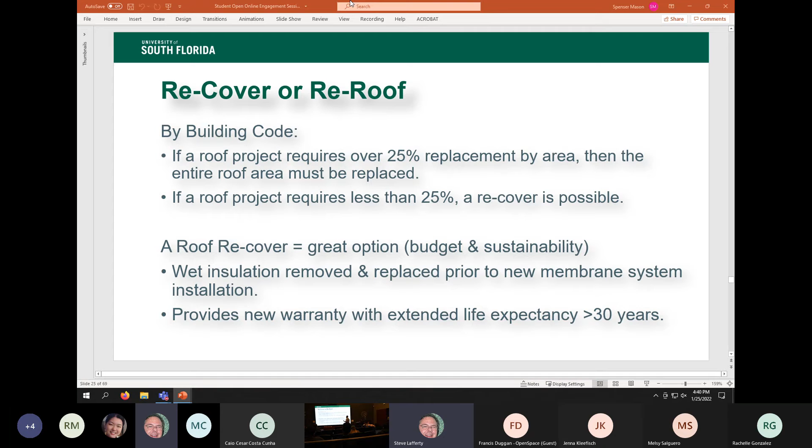So here's a good candidate for a roof recover because we only have a small portion of wet insulation that's been verified. Good candidate.

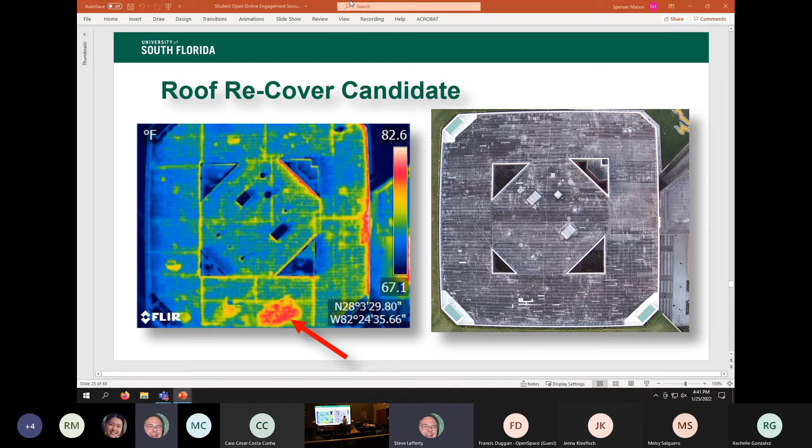Here's one that we actually did for a roof repair. We noticed we had some isolated wet areas, less than 25%. We hired a contractor to cut out that insulation and just replace the membrane in those areas. So we effectively extended the life another 15 years.

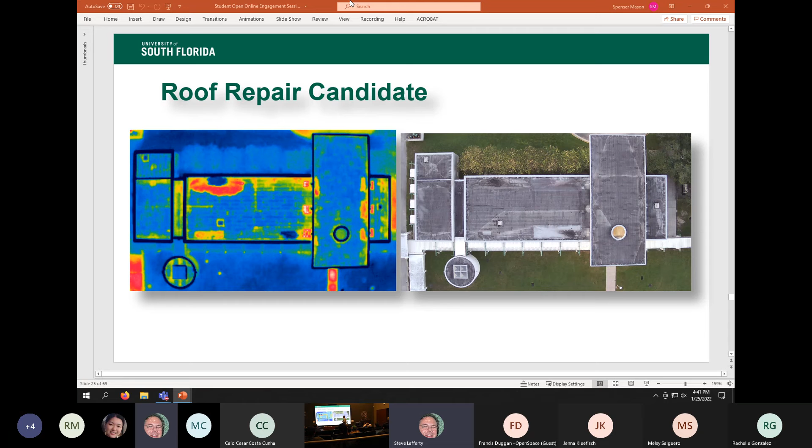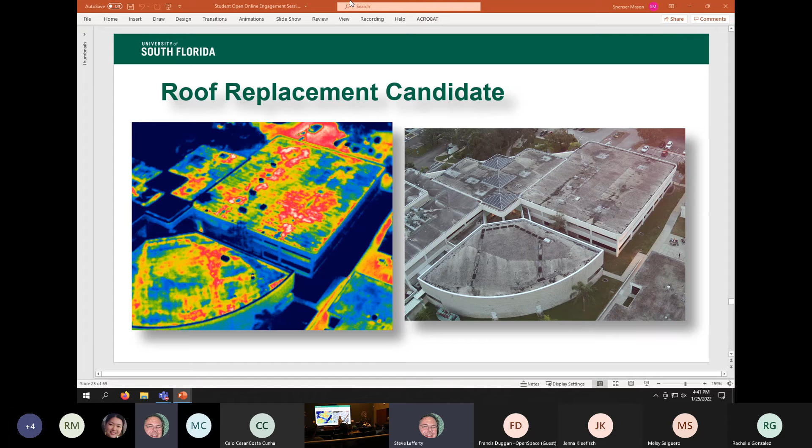This one is shot. Here we have maybe 25% or less of not-wet insulation, and it's a coal tar pitch roof. We need to replace that one.

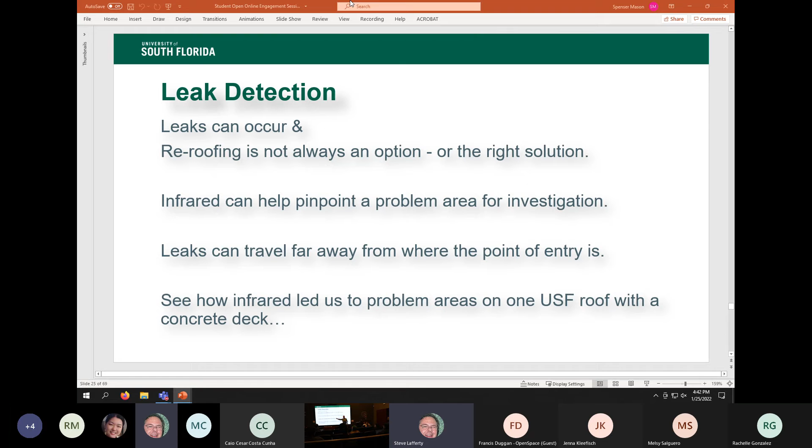Here's one of the fun ways we can use this for detecting leaks. It's not always a good option to replace a roof - we're the state, we don't have that kind of money. Even if you own your own buildings, you just can't do it. So we can pinpoint problems and see where it's coming in. Some decks are metal, water's coming straight through. With concrete, water can travel - it comes in at one spot, travels to find a weak spot in the deck, and that's where it comes in. So in the next slide, we'll see how that can help us.

It's no problem. It's what I do, Steve. So—

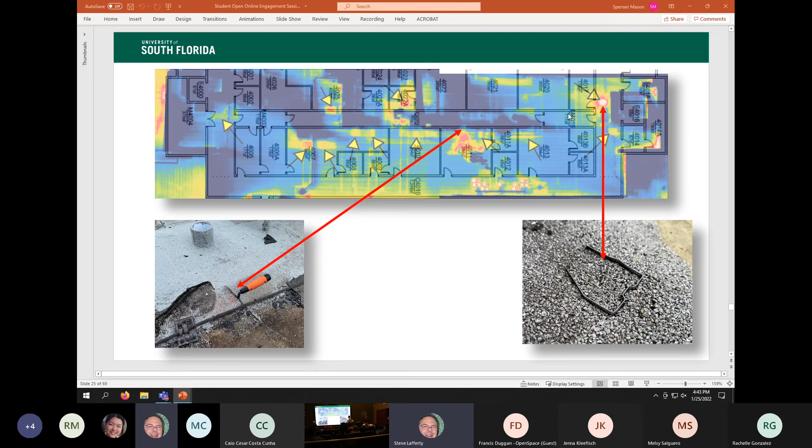That's it, any questions? All right, I like that. All right, Steve. All right.

So we do have about two more minutes left. As you can see, there's a lot of different technologies developed in totally different industries that are coming into the construction and design realm to help us do better design, better planning, better maintenance on our buildings, and make a huge difference in where the money is actually invested for our university as well as in construction and design projects.

Hope you found this interesting and not boring this time, but we will dig in our next open session. We'll talk about mechanical, electrical, and plumbing systems - we've got 3 very different buildings and how the different systems are being furnished to supply the necessary air, water, and all that other kind of stuff we need to make the building run. So, any other questions?

Yes, that's a dirty subject. All right, yeah, I'm sorry - I'm borrowing Rich's dad jokes.